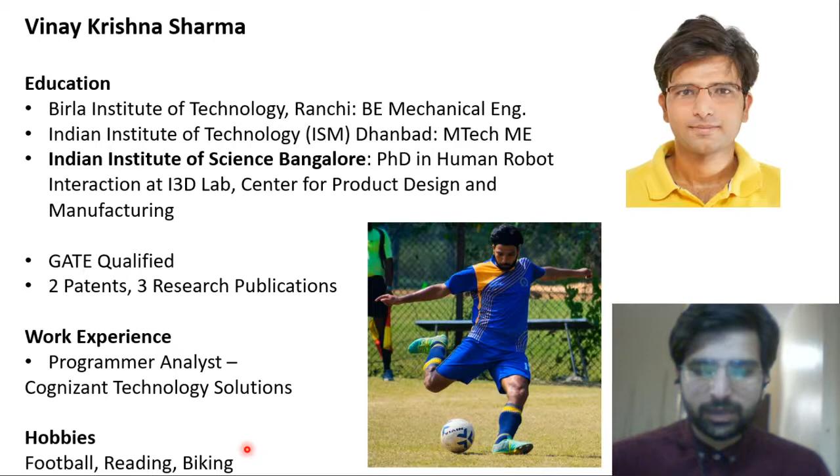So let's start with the discussion. The contents for today's discussion will be in 2 parts. In the first part, we'll discuss applications and uses of robotics in various different sectors like industries and manufacturing, military, healthcare, education, space, underwater robotics, emergency response and disaster management, and we'll look at some other robots. We'll also discuss the timeline of robotics, the growth of robotics, how robotics came into being, and what is the state of art today, and how it all started way back in the 40s during the World War time.

Also, the next part of the discussion will focus on human robot interaction - what is human robot interaction, and why did it come into being as a separate subject out of robotics, machine learning, and AI, with the advent of this new technology.

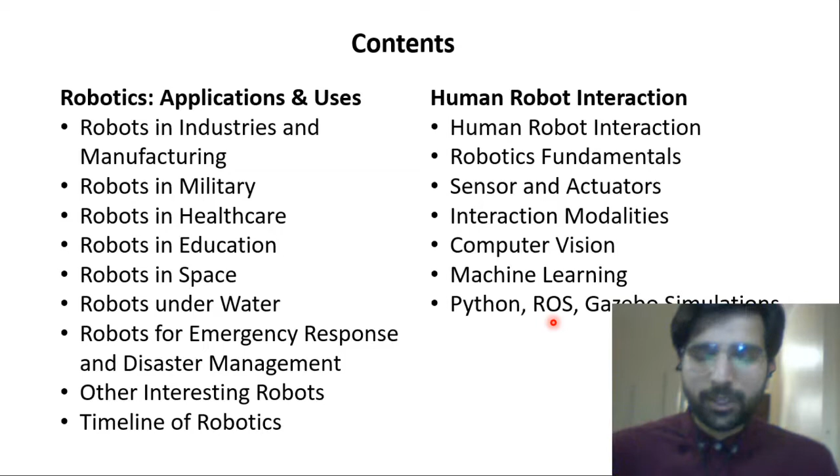So we'll be discussing what is human robot interaction, what are the robotic fundamentals, what are sensors and actuators, what are different interaction modalities which we'll be using to communicate to robots, what is computer vision, what is machine learning, and how to program robots in Python and ROS, and use Gazebo simulations to simulate a robot in a virtual environment. So without any further delay, let's get started, and here we go.

So we'll first see robots in industries and manufacturing. The biggest driver for this revolution of robotics, which started back in the 1950s and 1960s, is the industries and manufacturing facilities, which demanded our engineers and scientists to devise such intelligent and precise machines which can work continuously in our factories.

So all these robots are highly accurate, very precise, and repeatability is one of their properties. They can work 24/7, and they do not get tired. They do not need breaks in between. They do not need food. All they need is just constant power and a good program running at the back end.

One more use for these robots is they are programmable for adaptability. Unlike humans, they need not adapt to a changing new environment - they do not take time to adjust to a new task. You can just directly program it from one task to another task, and they will just do it without making a fuss about it.

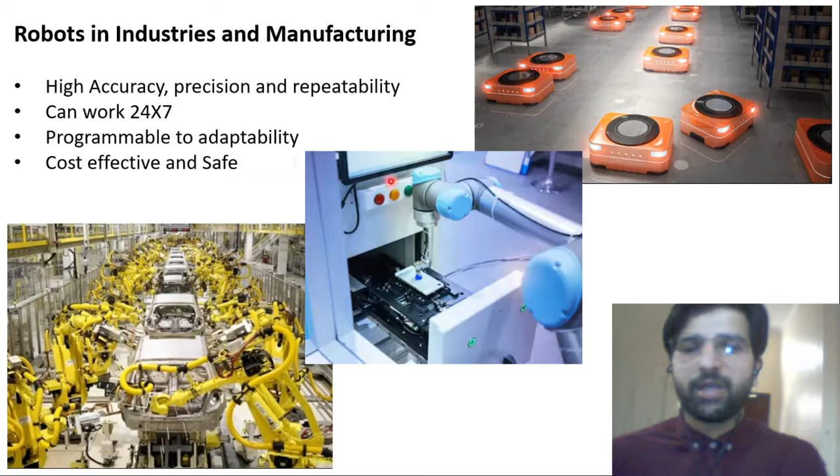And in the long term, they are very cost effective and very safe. Think of a welding situation, a cutting situation, which can be hazardous to humans. We can use robots and big robotic arms there, where there can be a risk to human life in manufacturing. Next, we will see robots in military.

So one of the biggest believers in robotics, after manufacturing and industries, is military and defense.

Researchers have tried, from long back in history, to devise machines which can be used for bomb and landmine defusing, which can extract wounded soldiers, which can be used for surveillance, and of course which can be used for killing enemies, deployed at the borders.

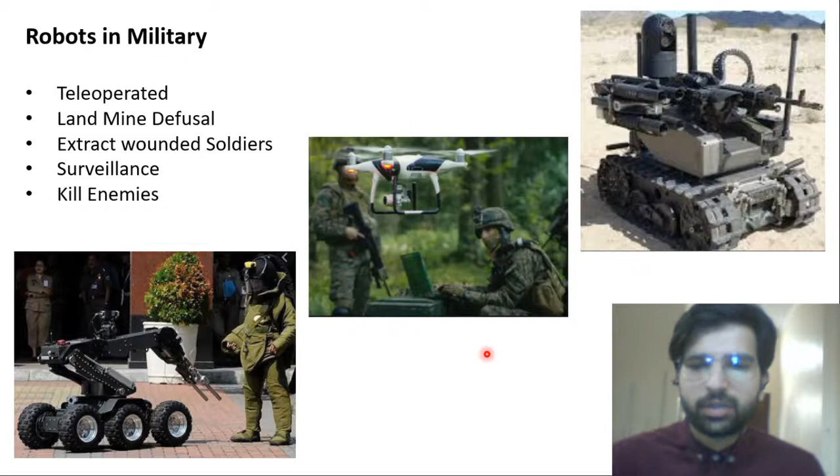Next we see robots in healthcare. The types of robots we see in healthcare are hospital robots for telenursing and telemedicine, surgical robots, care robots for elderly and rehabilitation, and exoskeletons for mobility impaired people.

A very good example is the recent lockdown due to coronavirus. These big robots are performing tasks such as disinfecting hospital facilities, providing deliveries, medicines, and communication to remote patients.

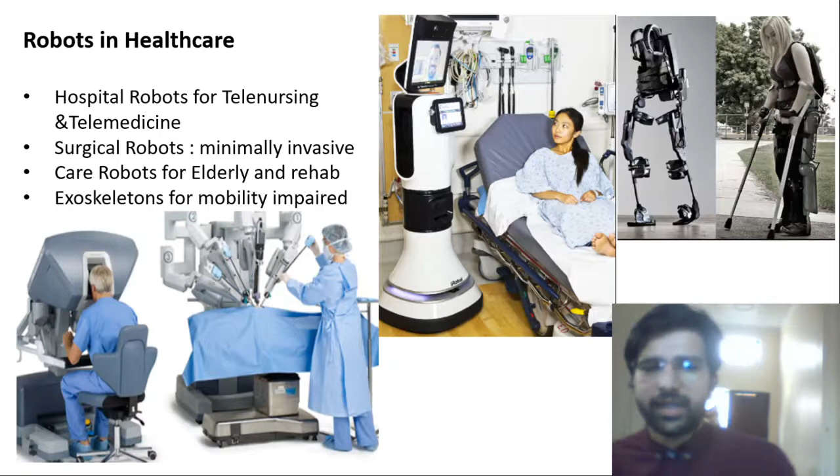On the top right there is an exoskeleton mechanism which can help a mobility impaired person, or someone not physically capable of walking. It can support the lower structure or back of that physically disabled person and help them walk. So robots like these are helping in healthcare, in the form of care robots and other social robots.

Now we see robots in education. With this recent advancement in technology, robots are entering our classrooms, making one-to-one tutoring possible. As there is high demand for teachers in schools, and with rising population there are more students per teacher, we can remove this barrier by using robots as mentoring or tutoring support.

These robots also provide a safe and neutral learning environment, as there are a lot of cases of bullying and students feeling shy to attend classes.

To make learning more fun and easy for students in school, in preschools and middle schools, robots are being deployed so they can teach students in a fun way.

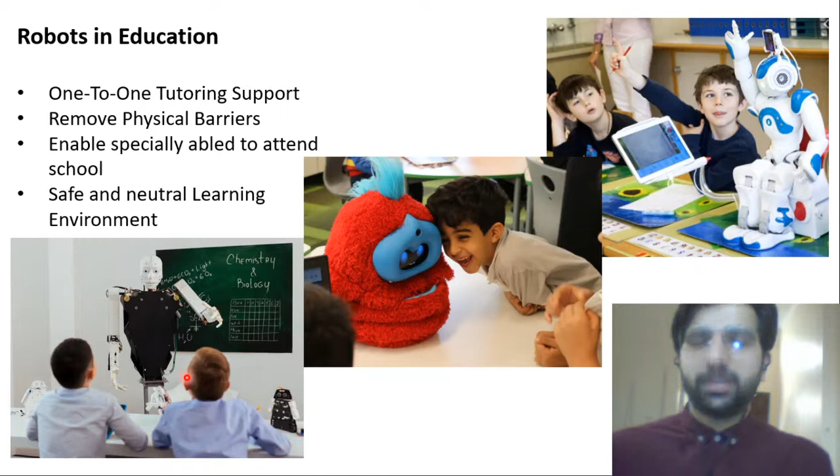One of the most promising areas where robotics is proving its worth is space. It's very difficult to go into space, and it's not easy to survive in adverse conditions like that, but we still have remotely operated vehicles on Mars.

Maintenance sometimes needs an astronaut to fly out of the spacecraft and check the fault himself. Instead of doing that, which is very risky for the astronaut - if you've seen the movie Gravity, astronauts may lose contact with the space station or shuttle and get lost in space.

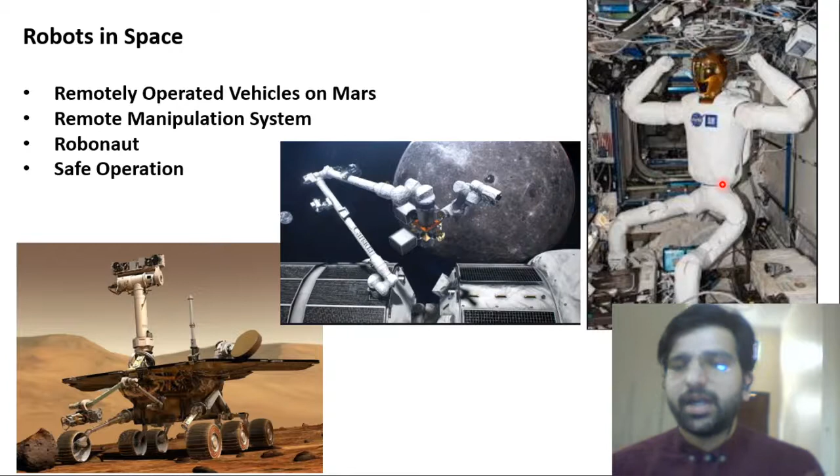Or you can operate this robot with the help of a system back on Earth. Down from Earth, you can operate the spacecraft and this robonaut. Even underwater, even deep down in the sea, we have robots there.

What type of robots do we have? On the bottom left you can see a robotic fish which can be operated by a joystick, a gaming pad like this, and this can be used for deep sea exploration and deep sea mining, observing corals.

And the deep flora and fauna under the sea - it can take scientific samples, take pictures, and go into very shallow and very deep trenches which are difficult, dangerous, and dark for humans to go.

In the middle, you see an underwater robotic arm, which is used for inspecting and performing maintenance activity on underwater pipelines.

These can be oil pipelines, internet grid or internet cables. They also get worn with time, so they need maintenance. You can send these robotic arms, mounted on an unmanned underwater vehicle like this on the right, to perform manipulation there.

Also, in case of disasters, you can use such robots for search and rescue. This, on the top right, is an underwater unmanned vehicle used for exploring the deep sea, where humans and human divers cannot go.

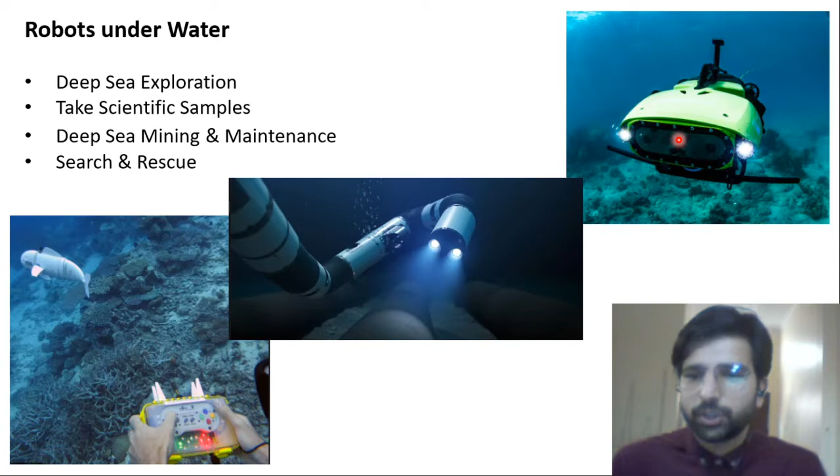Next we'll see some emergency response and disaster management robots. Suppose there is a landslide or an earthquake, and people are stuck under the debris. You can send robots like this one on the top left, which can remove the debris and carry out the survivors and victims of the disaster. Or a robot like the one on the right, which can carry injured soldiers or persons out from the disaster location to a safer place.

Suppose in case of a forest fire or a geographically separated area where people need first aid, food deliveries, or other supplies, we can send robotic quadcopters or flying robots carrying packages over a distance of a few kilometers to about 60 kilometers. They can drop the package and come back, and they can even take pictures of the route on the way to the destination, which can be really helpful.

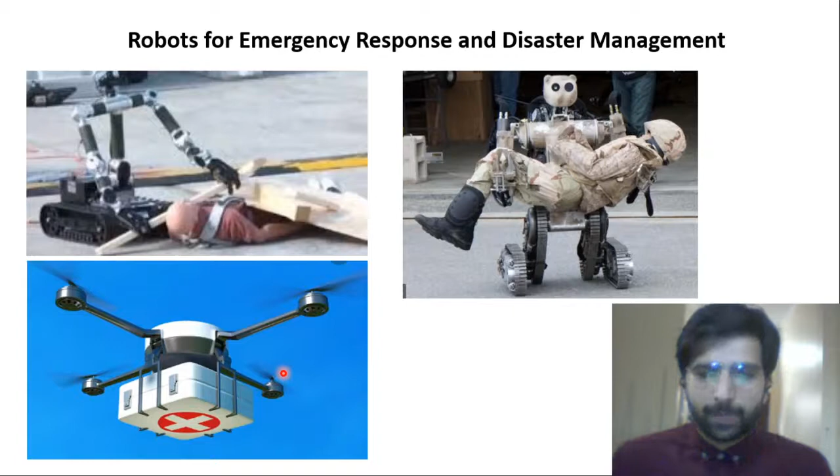So some other interesting robots are these. On the left is the Sophia robot by Hanson Robotics, the most talked about and first completely autonomous humanlike robot. You must have seen her in different interviews on YouTube or news channels. She can talk, answer your questions, hold objects with her hand, and do all this autonomously. In the center we have Atlas by Boston Dynamics, the first parkour robot. It can walk, jump, and even do backflips. You can search it online, it's very amazing to see what this robot can do.

On top we have this hexapod, which looks like a spider and is inspired by one. On the right we have the Boston Dynamics Spot, a robot dog capable of autonomously navigating through forests and through cities, and it can even open and close doors. If you kick it, it can get back up, and it has all sorts of similarities to a real dog.

The biggest invention or use of robotics in today's world is self-driving cars. Here you see a self-driving car. It can drive through traffic on the road and safely go from a source to a different destination, taking all the turns by itself, detecting all the other cars on the road by itself.

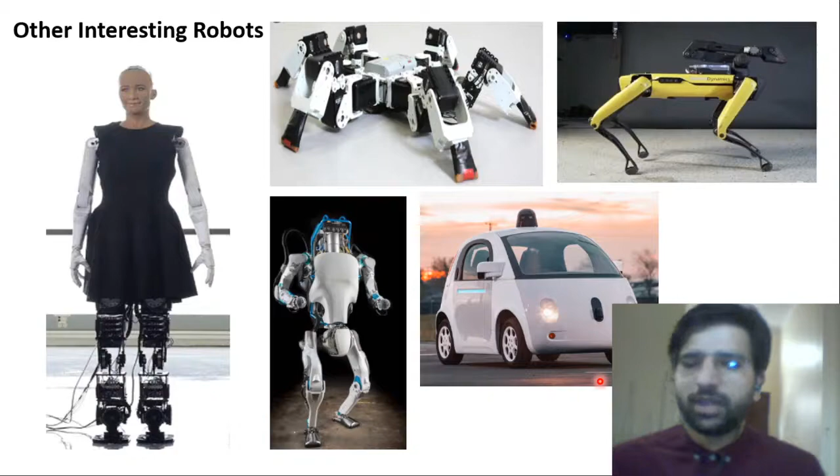Then moving on to the Stanford robotic arm in 1969. Then the first Sentry robot in 1985, which could patrol for more than 14 hours and alert about anything unusual in a range of about 150-foot radius.

Next is the biggest achievement, I would consider, when a computer beats a human at chess. This happened in 1997 when Deep Blue beat Garry Kasparov. Chess is a human-developed game, and Kasparov was the world champion for a long time before Deep Blue, a computer algorithm, beat him in the game. A computer beats a human in a game invented by humans.

Also in 1997 we had our first RoboCup competition, a soccer competition where a team of three robots plays football or soccer against a team of three other robots.

So it's very interesting to see where robotics was going way back in 1997.

Next we had DARPA's Centibots. These are the first iterations of warehouse robots, small robots which can work together as a team to perform a bigger task. There's a group of small robots which we can use to work as a team.

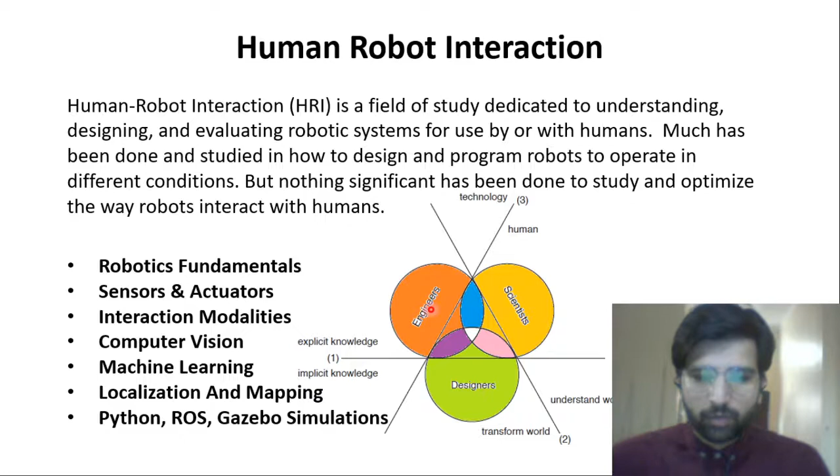So next we will discuss one by one all these topics. Let's understand what is a robot.

A robot must have a physical body. It needs a communication link, which can be wired or wireless. It has different sensors - sensors are the body parts, eyes, nose and ears of a robot, and actuators are the hands and legs, by means of which a robot can manipulate the environment - pick something, drop something, push a button. All these are possible because of actuators. So all robots, as we have seen, comprise of just these four or five parts.

This structure and these components are common to all robots, whether it's an exoskeleton, a healthcare robot, an underwater robot, or a flying robot. These are the basic parts. This is the basic strategy on which any robot works.

Sense, plan, and act. Sense what is there in the surrounding, plan what to do next and how to do it, and act - execute your plan. Next, we'll see what are sensors and actuators.

Sensors are devices which measure changes in the environment. Suppose I am filling my tank and there is a water level indicator which will tell me my tank is full now. So my water level meter is a kind of sensor which tells me a change in environment - the tank was not filled before, but it is filled now. This is a change in environment.

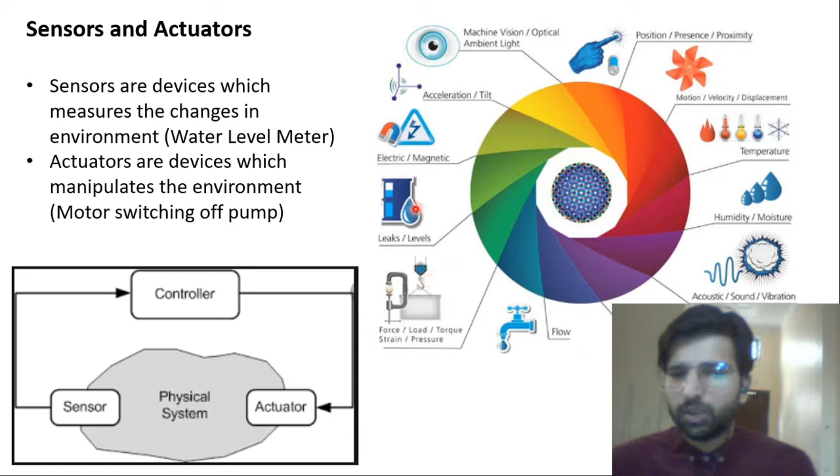On the right is a picture of, not an exhaustive list, but many kinds of sensors you can have: machine vision or ambient light sensors, position, presence, proximity sensors, motion, velocity, displacement, temperature sensors, humidity, acoustic sound and vibration, chemical and gas, flow sensors, leaks and levels, force, load, torque sensors, electromagnetic sensors, acceleration and tilt sensors.

Next we see the different kinds of interaction modalities available. Interaction modalities are the ways in which a human communicates with a robot. In everyday life you use a monitor, a mouse, a keyboard, a touch screen on your phone, or a joystick to control a robot.

You can also use a VR headset to interact with a robot, a controller like a gaming console, your gestures like in Kinect, or your voice like Alexa, Siri, or OK Google - do this, do that. The output we get is in the form of a display, sound, or even vibration like in controllers.

In recent times, with the advancement in technology, we have a new kind of interaction called eye gaze interaction - we can use our eye gaze to interact with the robot or computer screen. Looking from position A to B can move a robot from A to B, a blink can activate a function, and a double or triple blink can activate certain other functions.

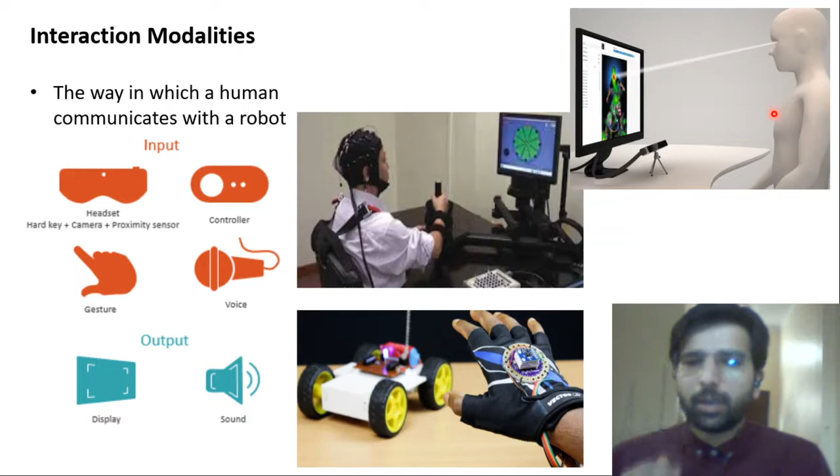So computer vision is understanding and interpreting information from visual data. Computer vision basically means the eyes for a computer.

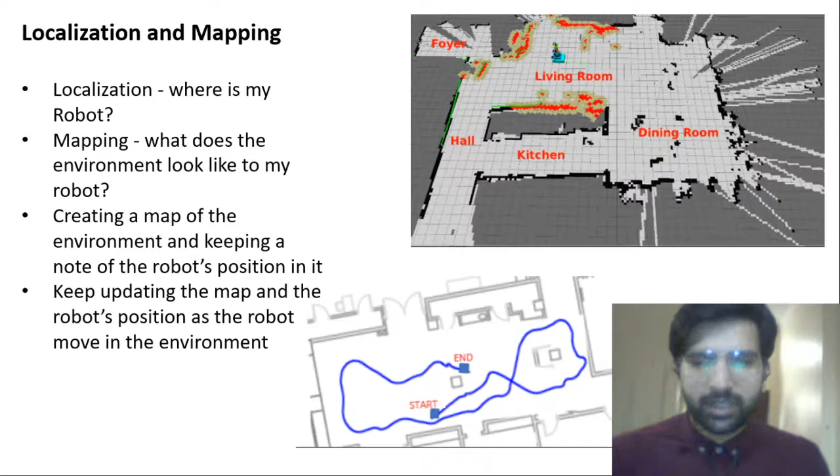Okay, I'm sorry, there is one more topic left. So we have this Python, gazebo, Python ROS, and gazebo simulations. Python is a programming language to tell robots what to do and how to do it.

And like any other language, C++, C sharp, or Java, I can use Python to program my robots, instruct my robots to do this and don't do that, right? And ROS is a robot operating system, a popular open source tool for robot integration and development.

I can use ROS to integrate all my sensors together, and create an environment in which I have images from my camera, data from all other sensors, and I'm writing my algorithm in that and deploying it whenever there is a need. So ROS takes care of communication, visualization, perception, robot control, hardware drivers, machine learning, data logging, simulation, computer vision, and motion planning, all in just one place.

What is gazebo? It's a virtual environment with real life physics where we can run different types of robot simulation without the need of having a physical robot. So if you take a ball in your hand in the real world and drop it, the ball will go down and bounce back up, and after some time it will stop. This is because there is gravity present in the real environment.